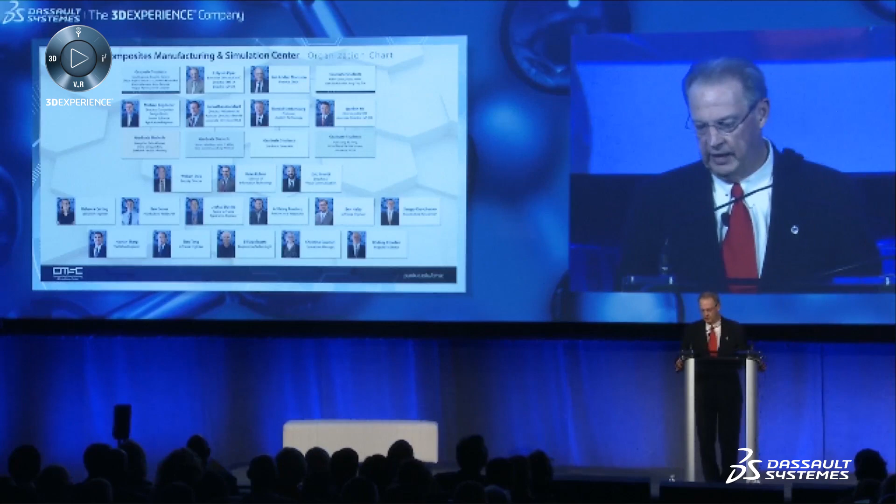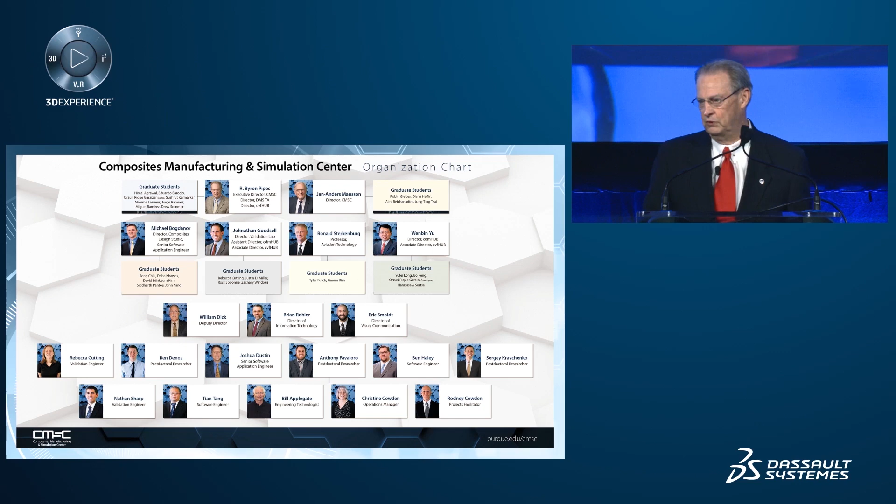Let me just give a few shout outs or thank yous to the team that I represent. Here you see a group of faculty and engineers. What's not seen is the number of wonderful graduate students that are involved in this group. I want to call special attention to Jan-Anders Mansson, who we've recently attracted to Purdue to join us from EPFL in Switzerland. He and I are partners today. We have a partnership, and perhaps we're the two people in the world who've spent most of our time thinking about how these new products will be manufactured from these materials.

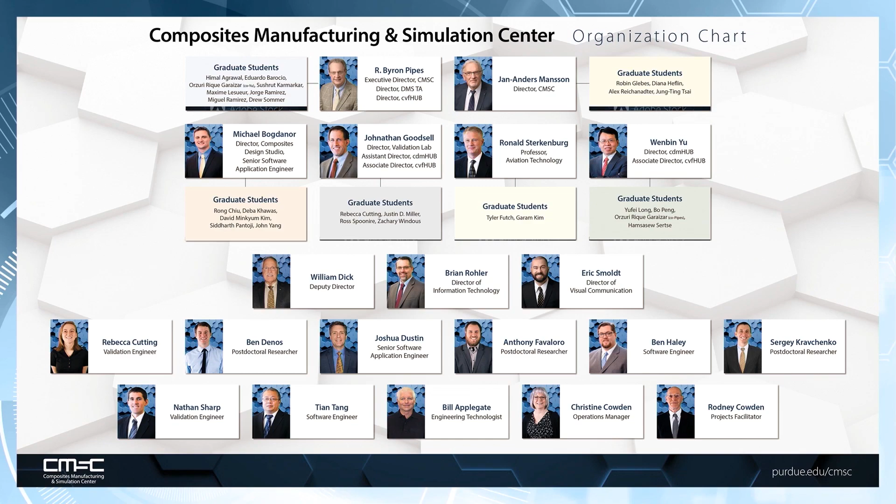We live together in a building called the Indiana Manufacturing Institute. Many people refer to it as IMI, as the acronym would be. This is a building in which the university and industry meet. And it's actually not on the campus. It's in the research park at Purdue, just north of our campus, but within easy bicycling distance.

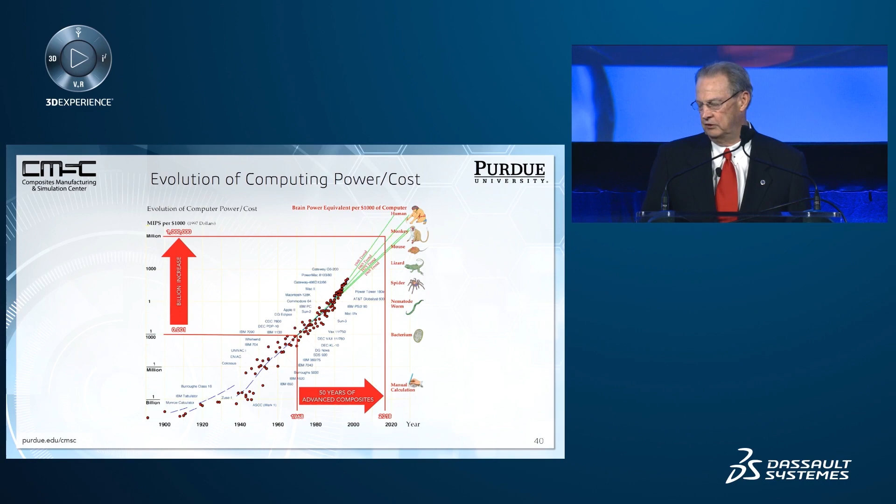I want to take a moment to think a little bit about what has happened just since I entered the field of composite materials in 1968. Look at the increase in power that we have today at our disposal. Now understand, 50 years ago, we were thinking very much about how would we build an aircraft from these materials, and we were thinking about them in all of the processes, procedures, engineering discipline that was required to be developed. So I asked myself at the time, and others did as well, how will we do this? How can we model this problem? How can we engineer it? The answer was not very satisfactorily, I might add.

Computers were relatively small at that time. And look at the increase in power, 1 billion times over this 50 years. So what technology has increased the most during this time? It is simulation power and the tools that drive that innovation.

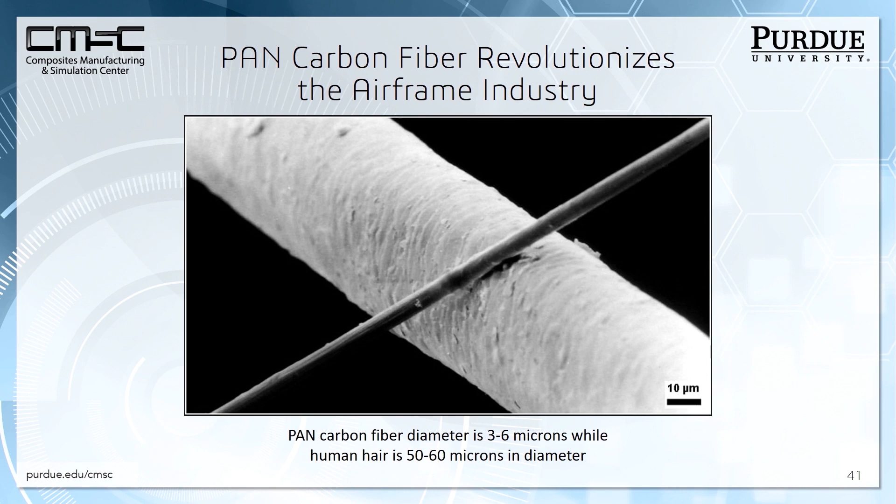Just to put this in perspective, if you've not actually ever seen a carbon fiber, they are so small, they're very difficult to see actually. Smaller than a human hair quite a bit, of the order of 5 microns, and yet these strong and stiff materials provide the foundation for a class of growing materials that one has available to them.

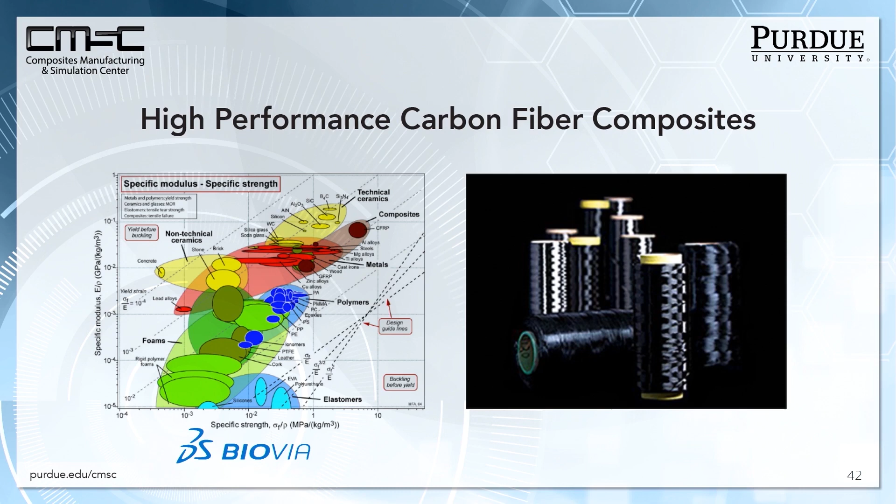By the way, BIOVIA, the tool that here is at the very base, if you will, starting at the nano level and the molecular level, can in fact produce or predict the properties of many of these material systems today, and that capability is growing. While I'll not illustrate that concept here today, it is at the foundation of much of what we have done, both in fiber synthesis and in polymer synthesis and their interactions. So there is science at the base of all of this engineering, as you might expect there must be and will always be.

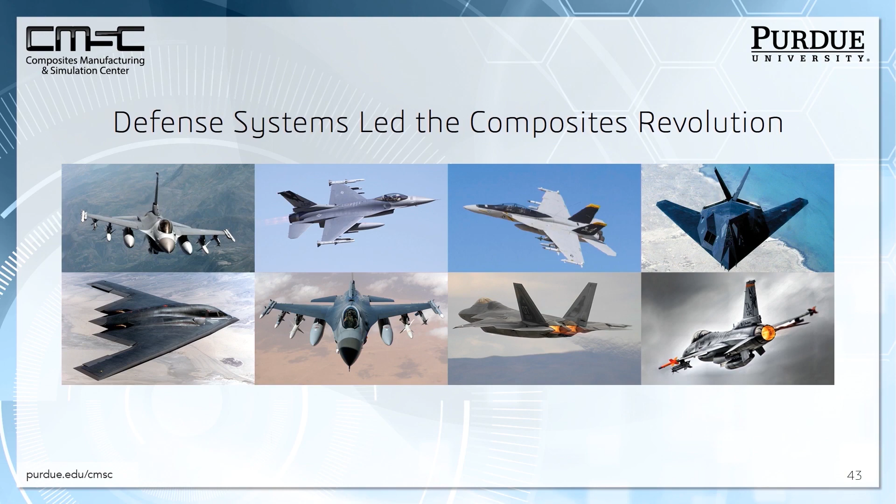What has this technology produced first? Well, in this country, we perhaps spend more money in defense of our nation than we spend in anything else, including health care, although the two are beginning to rival one another as they should, in my opinion. I hope there comes a day when we spend all of it in health care and human prosperity. But the first application of these materials was in defense. And we've gone through a process where we learned how to manufacture them, we learned how to deploy them.

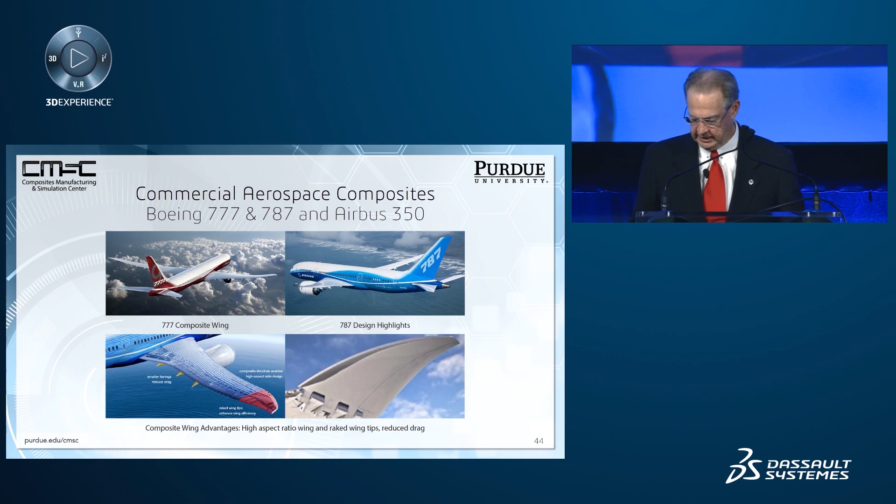That took some years. Following that, many of you may have flown here on the 787 or the Airbus 350, both of which are all composite. And today we're introducing an all-composite wing in the 777X airplane, soon to be released and, if you will, roll off the manufacturing floor. This airplane has a wing that's so large it has to have a hinge at the end so that the plane can roll up to the gate for the passengers to either enter or depart. But it's an enormous accomplishment on the part of the Boeing company, and that is underway. This gives us greater efficiency. Flights now can take place with less fuel and less pollution, as the case may be.

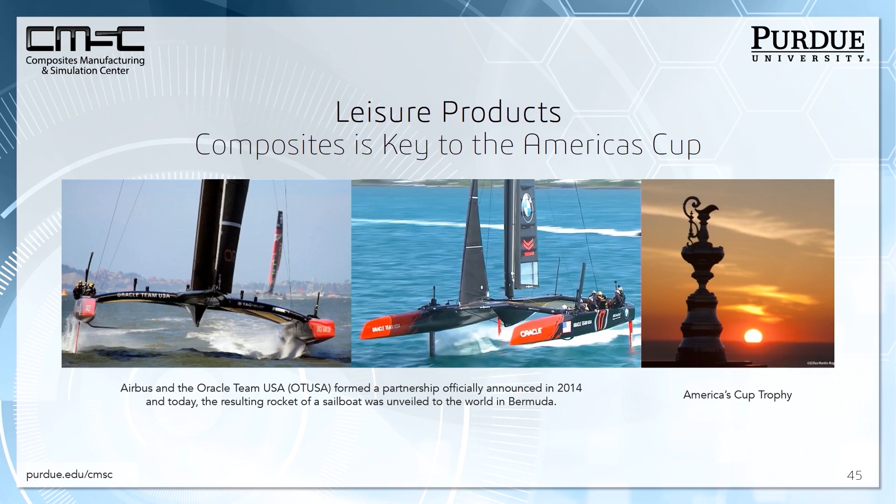From that has come leisure products. Interestingly enough, as we thought about the application of these materials and the future, the leisure product industry immediately stepped into that opportunity. And carbon fiber now provides the primary material form for the America's Cup applications you can see here. Not only the hull of the structure, but all of the mast structure, the wing, if you will, the sail, are all carbon fiber. And this competition has led the way in teaching us how to drive the technology to its limits. I'll speak more about that in a moment.

An extraordinary accomplishment, but notice that this vehicle is also manufactured at the rates at which automobiles must be manufactured in order that hundreds of thousands of units can be produced in the time necessary for the product to be supplied to those who wish to purchase it. Whereas aircraft, as we well know, can produce products that are produced in days or months. Cars have much shorter time frames for production. This is a subject that I'm going to return to in just a moment.

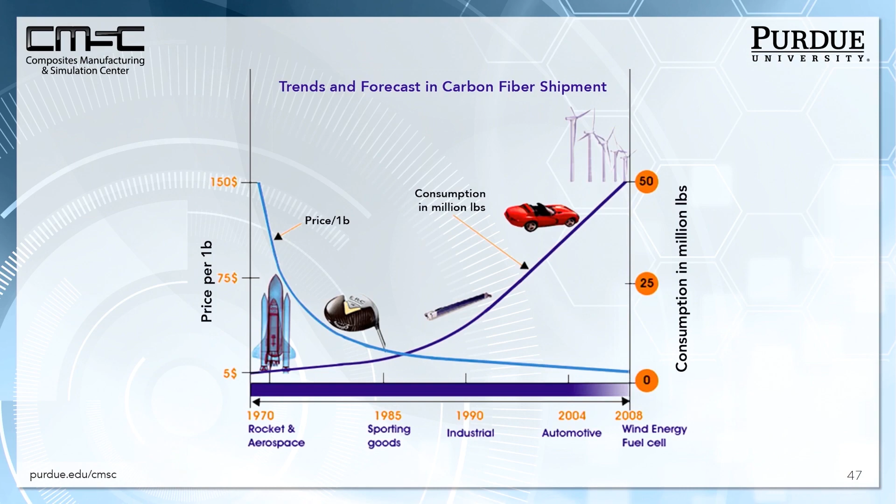As a matter of fact, if you look back over the years of what has happened in this field, and this data is a little bit old, but frankly the curves remain for the next decade, they just continue, such that today we produce over 100 million pounds of carbon fiber in the world, utilized in the products that are being consumed primarily in the automotive and the leisure product industry, all across golf shafts, tennis rackets, and on into wind energy and the like.

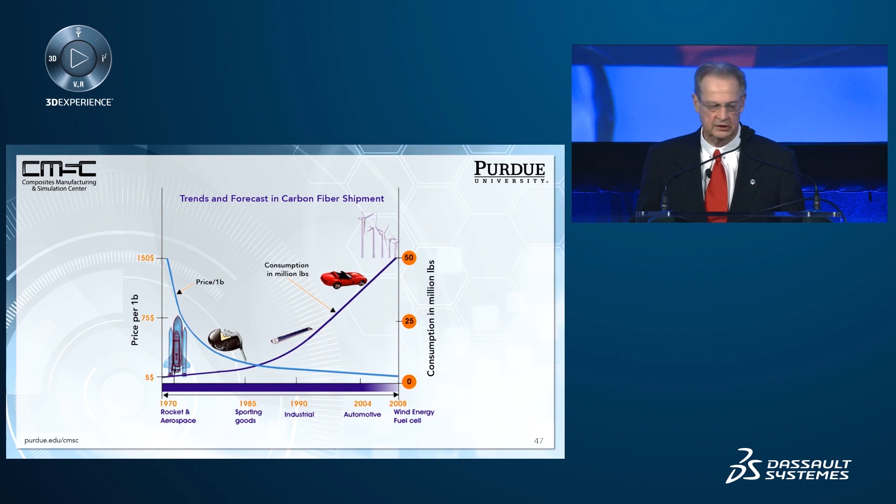One comment is that as we had the major invention of these materials in the space era, their costs were extraordinary. But as leisure products began to enter this market, the cost began to come down as the volume went up. That cost-volume correspondence, if you will, clearly that economic principle continues to hold in this area as well.

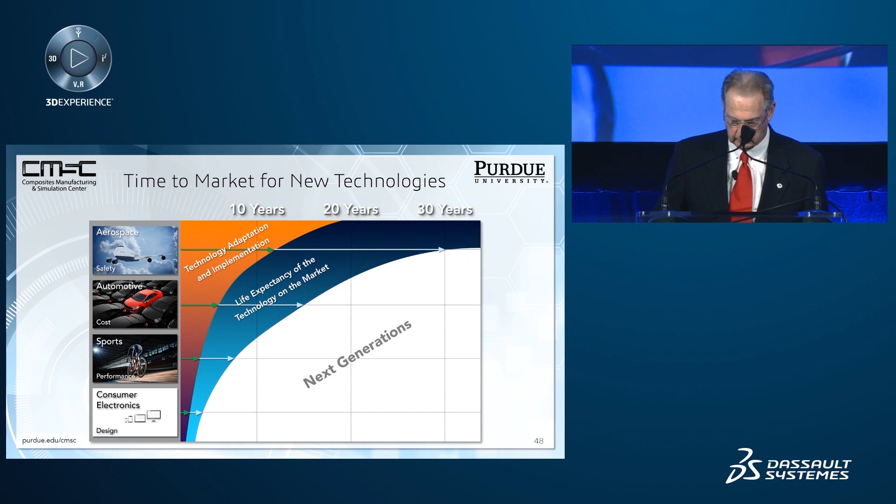Now, as we think about, as you make a business of any of these products, aerospace is a good example where we spend numbers of years of investment in the development of the materials and the design, after which we have a considerable number of years of market in which profit can be extracted to pay back that investment.

If you look at the other end of the extreme, and that is the consumer electronics industry, you see that products turn from the design phase to the market phase in sometimes months. The contrast is interesting, and it suggests to us what is coming in aerospace as well as automobiles. We must turn the technology development time faster in the future if we're going to meet the needs of our population for these products. And now, as you'll see in a moment, some of the industries have discovered this and are understanding what's going to happen and what needs to happen.

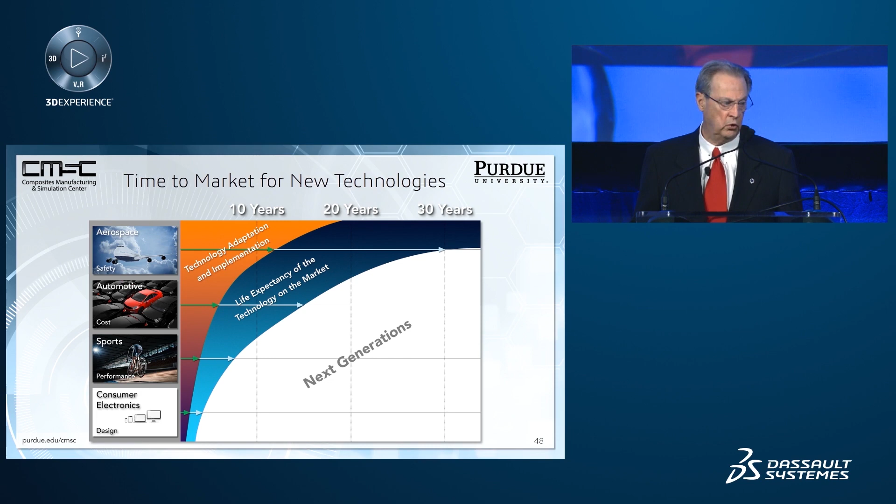Interestingly enough, the composites industry, as we know it, came from aerospace. It went then to leisure products, and now to automotive. It'll be interesting to see, as you'll see in a moment, can it go in the reverse direction? Can we use the rate methods that we're developing on automotive and leisure products in aerospace, and with the same level of confidence we do today? I think the answer is yes, but let me give a couple of examples.

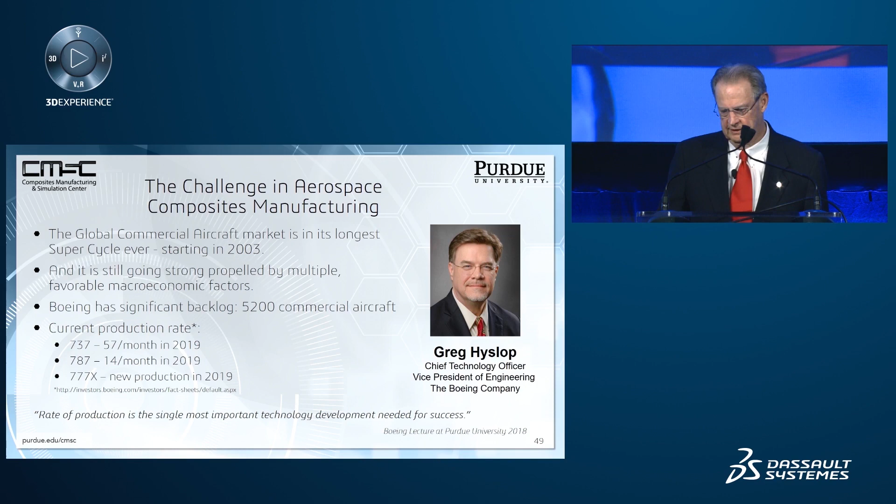Greg Hyslop is the Chief Technology Officer of Boeing, and we recently met with Greg. He came to Purdue to give a talk on what he was doing, and he appealed to us that he has this challenge. Perhaps the whole aerospace industry has this challenge, which is the demand exceeds the ability to produce in the time frame which we have. We must accelerate this manufacturing process.

Just look at those numbers. A backlog of 5,000 orders, the ability to produce much less than that. How do we meet that objective? And he appealed to us. Spend some time thinking about this. Come back to me with some ideas, and we're doing that. By the way, the supply chain that he had for the 787 is a global supply chain.

Now let me return to the word language for a moment. And I don't mean English, I mean simulation. What is it that could possibly tie this complete supply chain together in an efficient way? There's really only one answer, and that's simulation. It has to be the answer. But is it? Well, not yet, it isn't. As a matter of fact, as I'll state in a moment, there's some challenges here. There's some challenges to access. There's some challenges to need. I'll come back to that shortly.

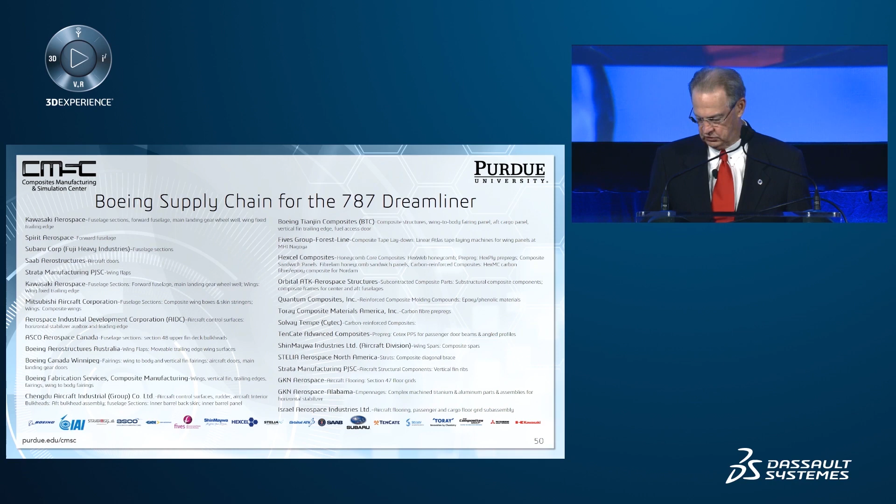So, if simulation is going to be the language of innovation, and if these products are going to be supply chain based, large numbers of suppliers worldwide, lots of different cultures and languages, how do we glue them together? The answer is the supply chain must have access to this language and to this set of simulation tools.

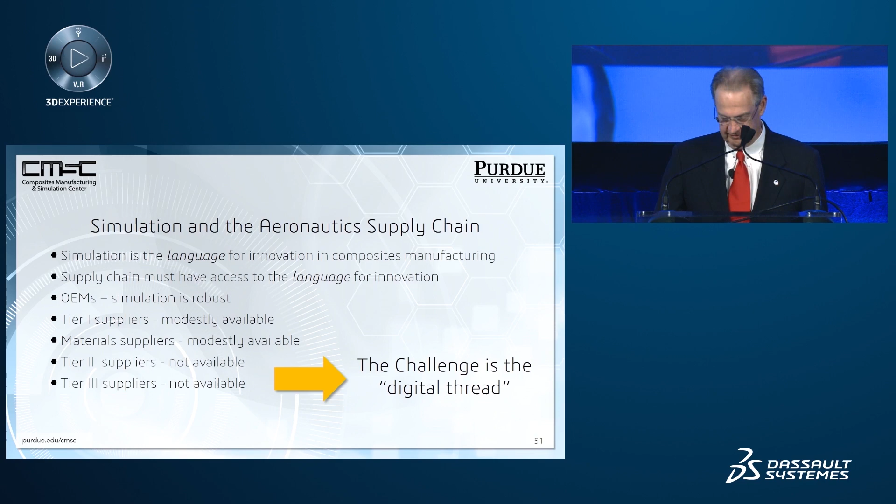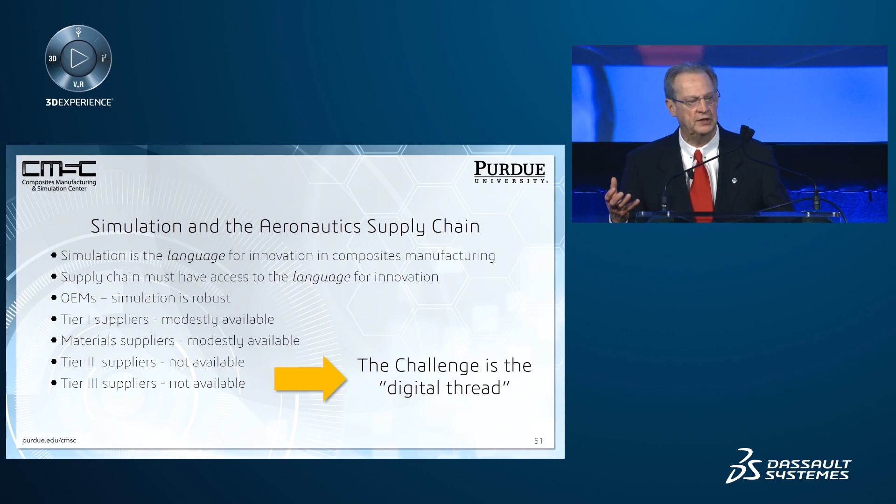Today, OEMs have it. They do. They helped generate it. They drove it. Material suppliers and tier ones modestly have it. Tier 2, tier 3, they don't have it. They need it. They must have it. So how do we preserve a digital thread if people or organizations within that digital thread don't actually have the thread? This is the challenge, I think, that we are faced with today.

So let's look at a vision for how that might be if they had access to it. If they had everything easy and in their hands and had the educated human talent and engineering talent to use it. Well, we could begin to deliver manufacturing informed performance, not the performance of something ideally designed and perfect, but that which was manufactured the way it must be manufactured and the performance that comes from that. We need to do that.

We must have a digital twin in manufacturing, not just a digital twin in geometry. I thought of the example just now about the digital twin of the human skeleton. You must actually model what is there, not what you'd like to be there in the design process. So we need the Composites Virtual Factory. If we have that, well, how do we deliver it? How do we deliver it to the supply chain?

I want to show you an example that we're developing at Purdue that we think is maybe an early example of what you will do as this goes forward in what we're calling workflow apps. Think phone apps, and now you have the analogy that I'm thinking about. A single, if you will, focused solution by the simulation code that you're using. It doesn't solve everything, it solves only what I need.

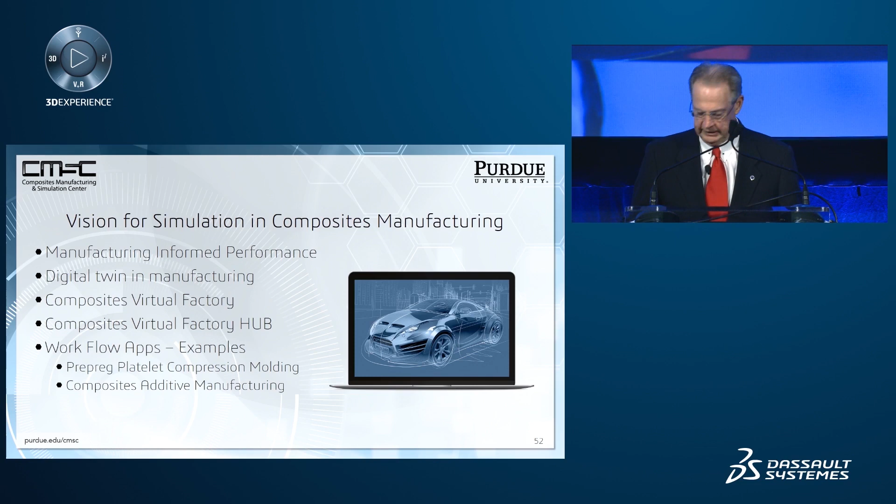There are an infinity to do, but we have identified 12 major ones that we think are the right ones that will capture all possible manufacturing methods. Of course, that's not possible, but at least some have not been invented yet. And I'm going to choose prepreg platelet compression molding today as an example because it illustrates how one must integrate several competencies to produce these apps.

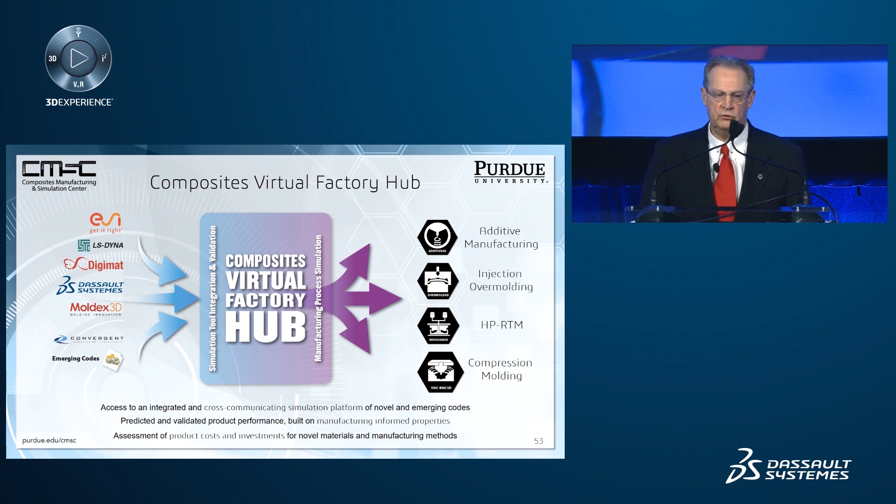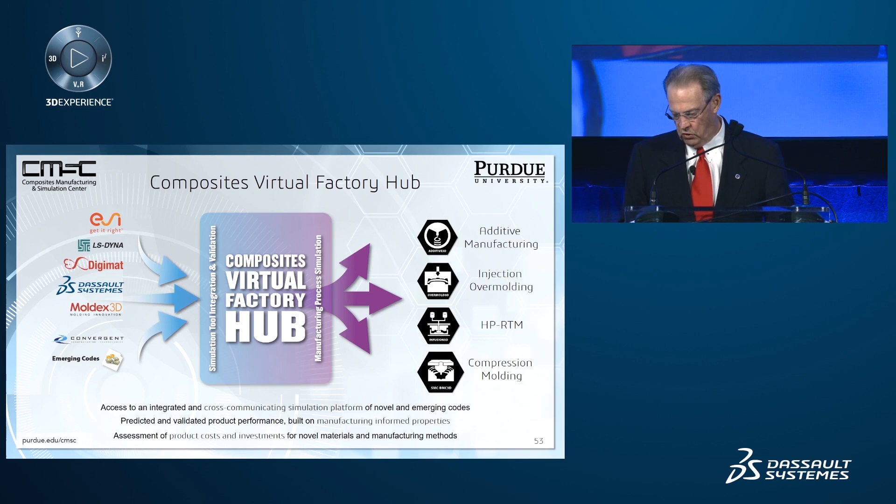On the right, you see the app for additive manufacturing, additive 3D. You see it for injection overmolding, overmolding 3D, high pressure resin transfer molding, and so on. The example we're going to go through today is compression molding.

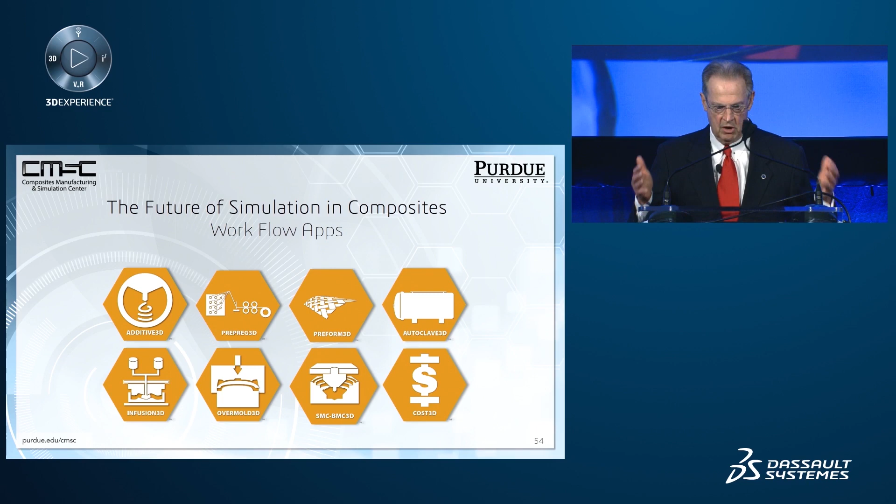Why is this important? Because in manufacturing, I start with a manufacturing process to produce something. I do not start with all possibilities. I must choose among these, and I must model all aspects of that. Here I've identified additive 3D, prepreg 3D, and you can read those. The last of which is cost 3D, meaning cost modeling must be integral into manufacturing, as we know.

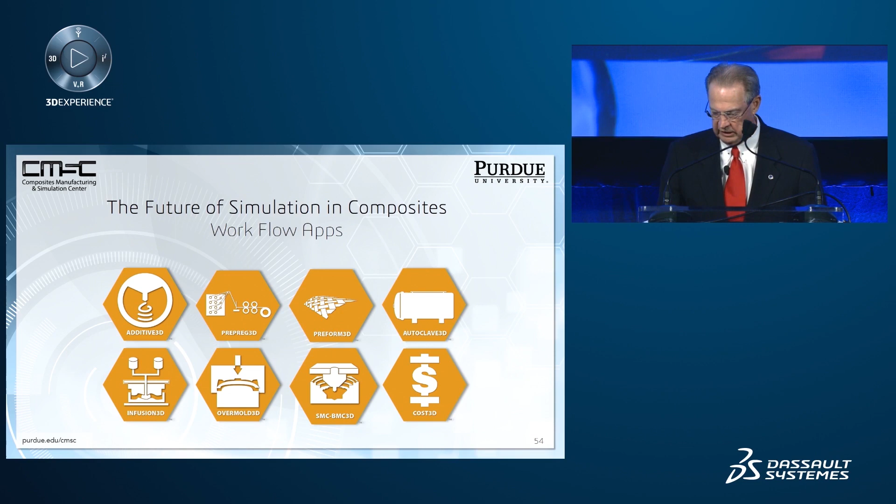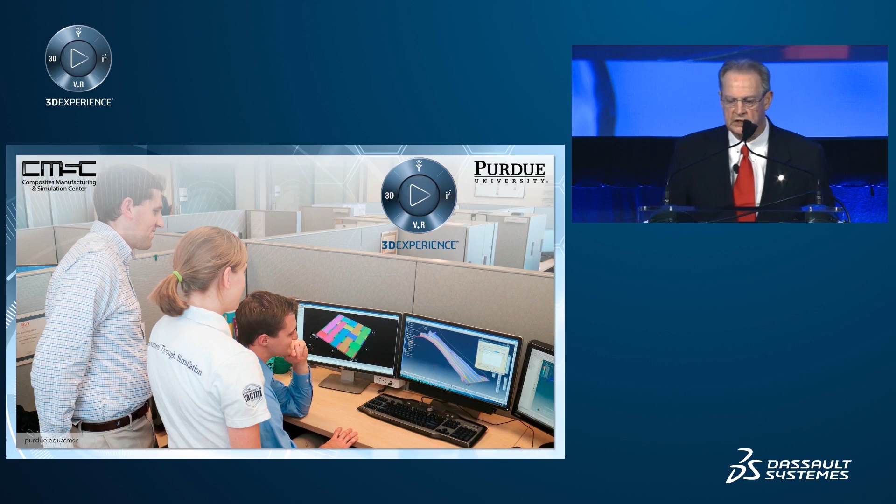I want to say that the 3D experience and the world of the Composites Virtual Factory are in many ways coincident and in many ways require one another in structure. In the first case, the people that are necessary for that are illustrated by 3 of our engineers observing and participating in a project related to a specific manufacturing process here. And then the simulation tools themselves that support those people. That is the Composites Virtual Factory of the future.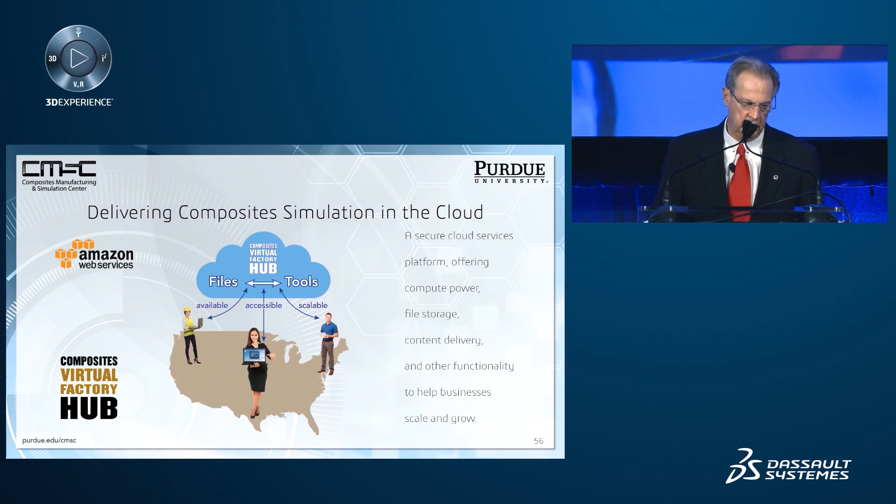It's delivered, and the version that we're working on, the Composites Virtual Factory HUB, it's delivered by the cloud, and it's delivered to a browser-based system so that individuals can, no matter where they are in the food chain, if you will, the supply chain, have access to these capabilities.

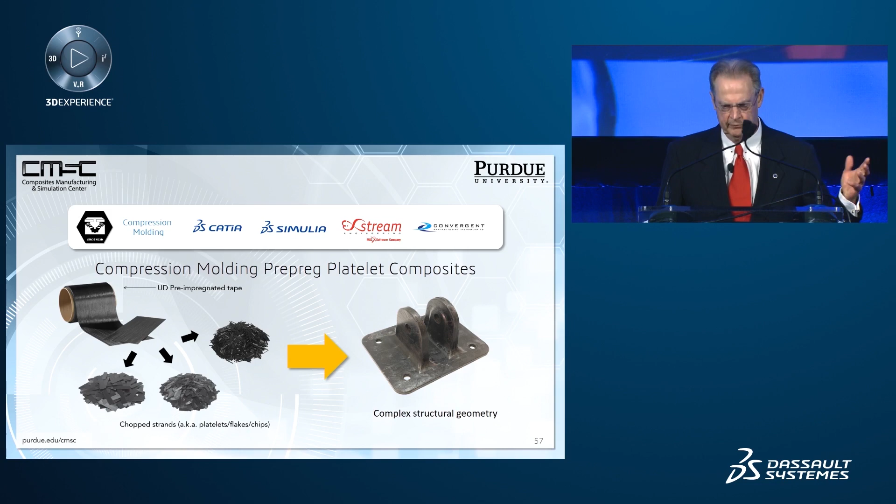Let me take one. And I know that not everyone in the room is a composites expert, but just take a moment and follow with me. Platelet composites, we start with a prepreg tape. We actually have continuous fiber in that tape. It's very much like fiberglass reinforced tape, if you will, that you wrap a present with. But this is carbon fiber. We cut it into small pieces. We then mold it into parts.

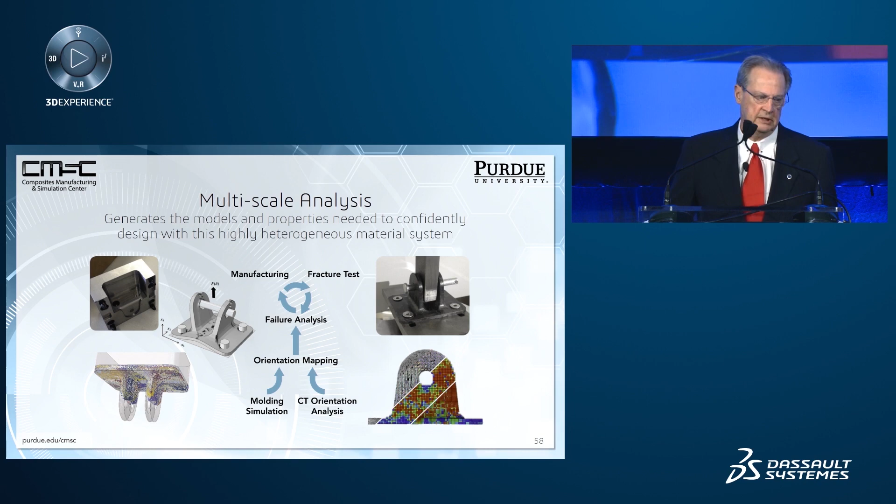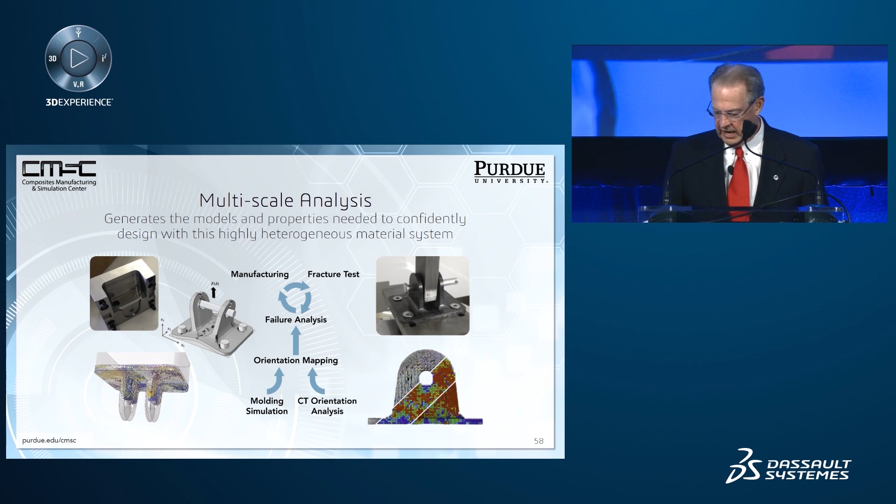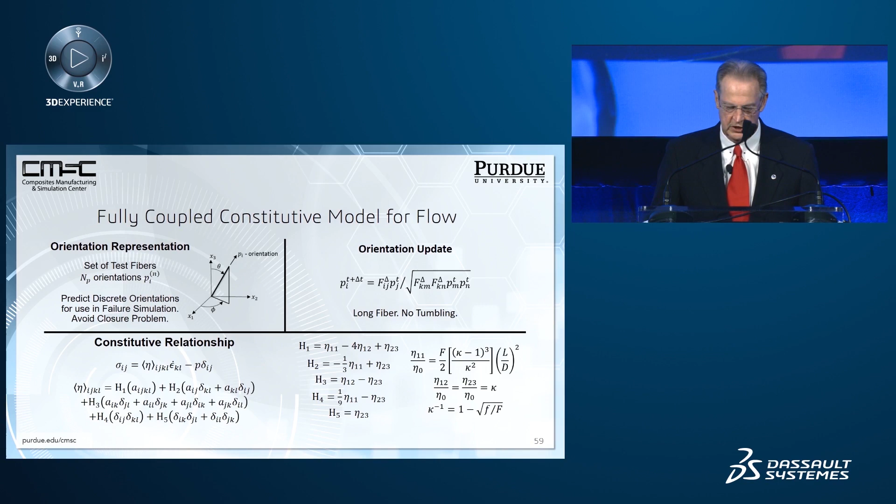The question is, can you follow that molding, develop those internal geometries, very much like the internal geometry of that orthopedic structure? Can you model that process? And the answer is yes, but one must start with some relatively sophisticated mathematics. Here we have the tensor for viscosity of those systems. It's a 4th order tensor, and it's related very much to the orientation of the fibers in the system. So we must follow that orientation.

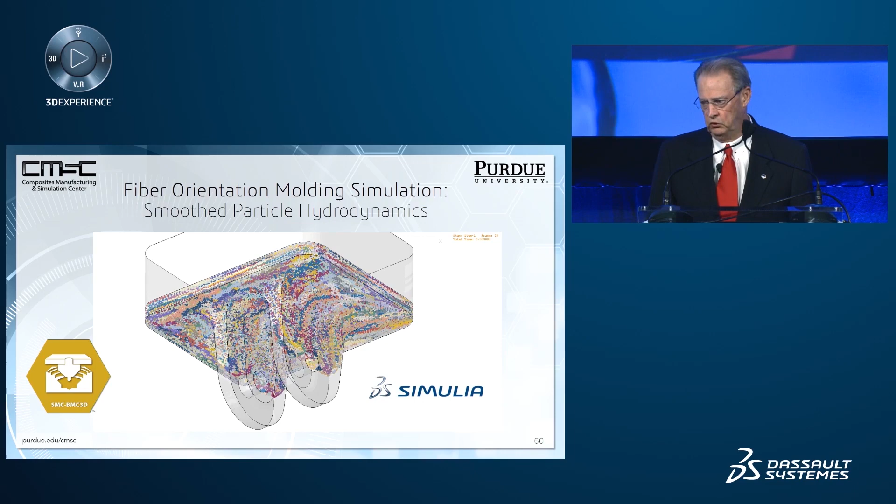And here I show you some smoothed particle hydrodynamic simulations within Abaqus, perhaps never intended for this purpose, but now showing that we can follow the platelets as they are cut in the part. We can follow them. We can follow their orientation state. So now we have more complexity inside the material than the geometric complexity that has been described so far. That geometric complexity internal is mapped into the real part.

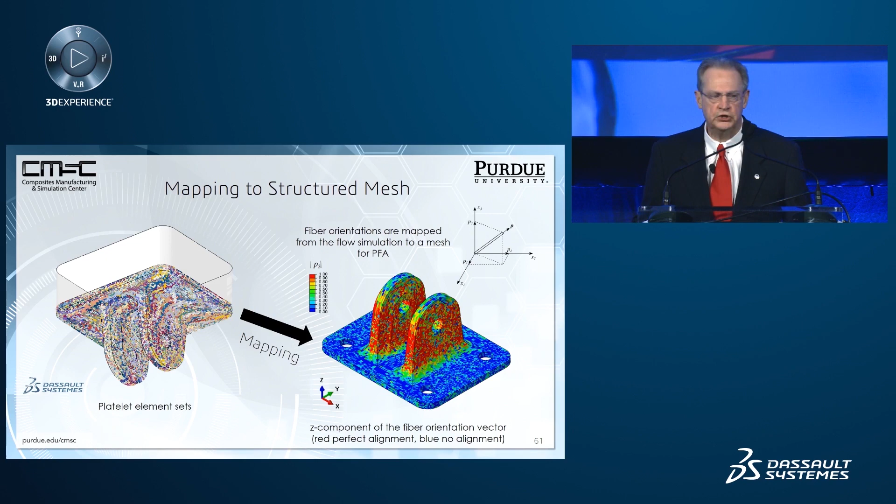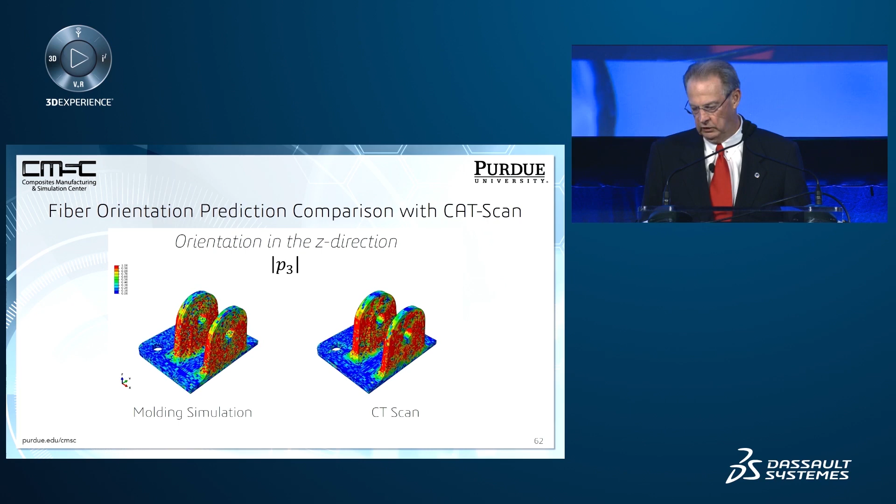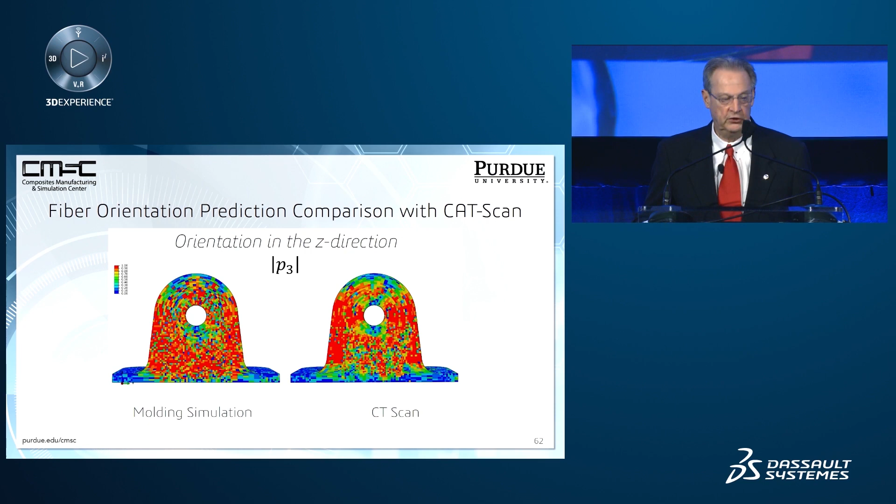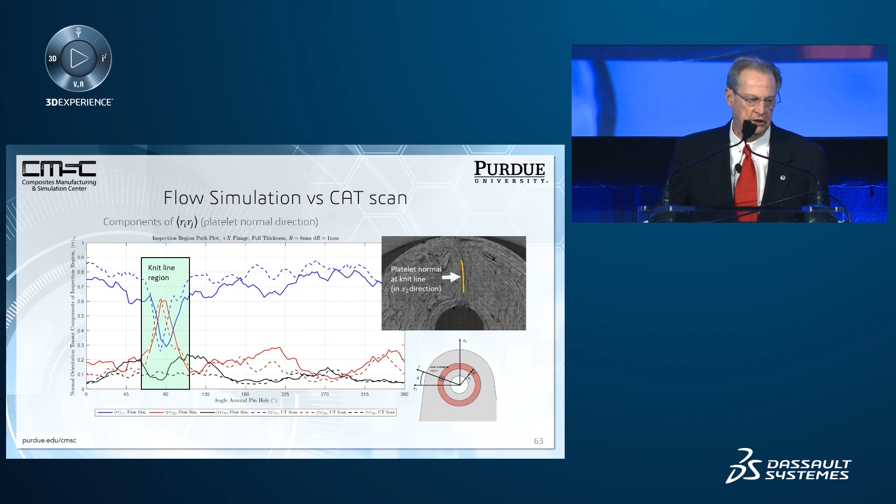And then if you take a look at plotting around the molded-in hole, if you will, you see how good that simulation is, even in very discrete points within the structure. We can simulate very complex problems in these systems.

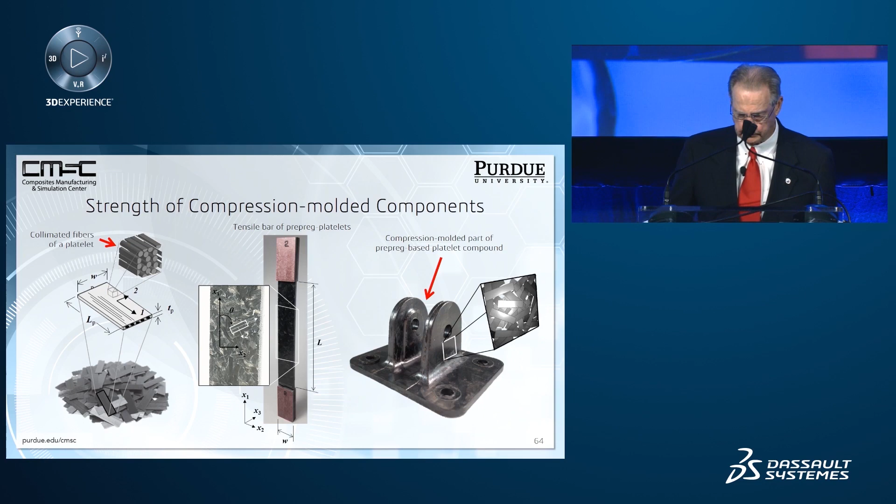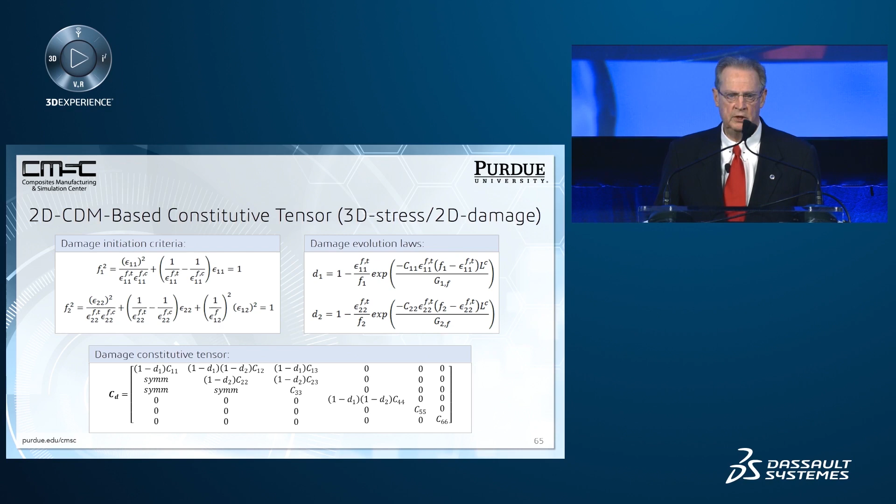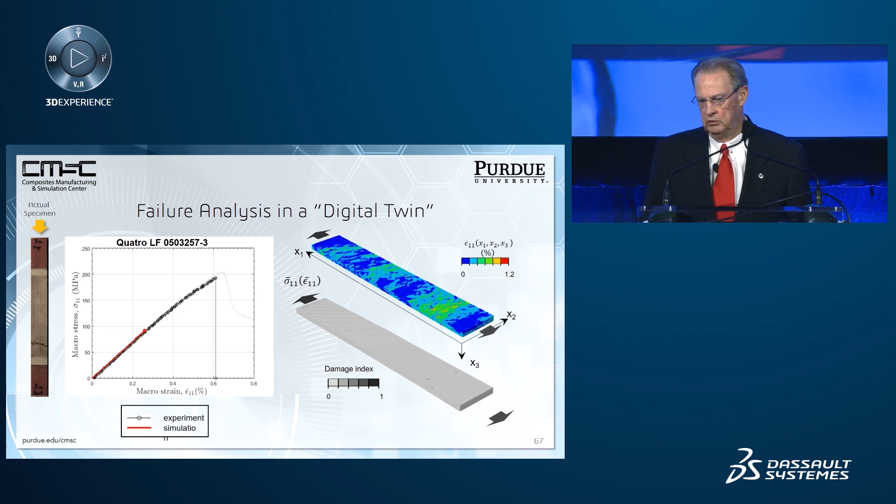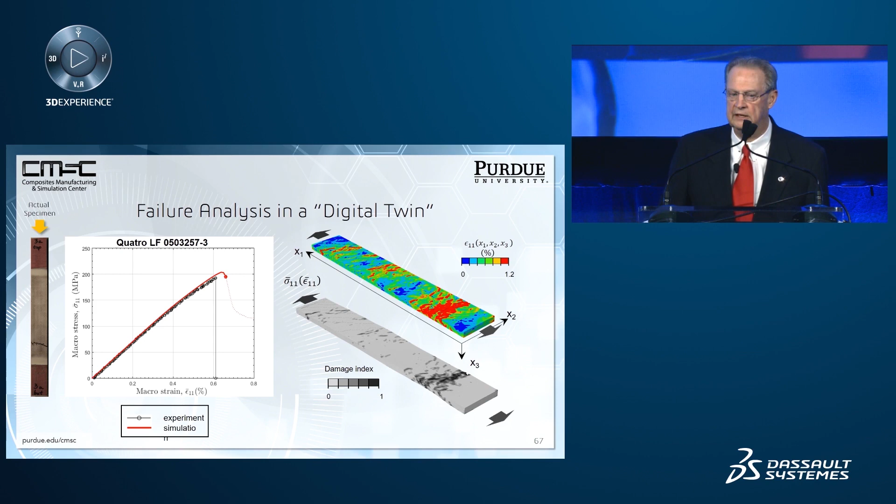Can we do the same thing with the strength characteristics once we know the internal microstructure? Again, we go through some internal capabilities in Abaqus, composite damage modeling, and we construct the virtual image of the real material, and then we can carry out a virtual tensile test of the material. On the right is the virtual part, and on the left, you'll see the red, gold arrow there. That is the real part, and if the question is, did it fail at the right point, and does it have the right morphology? Answer, yes, yes, this works.

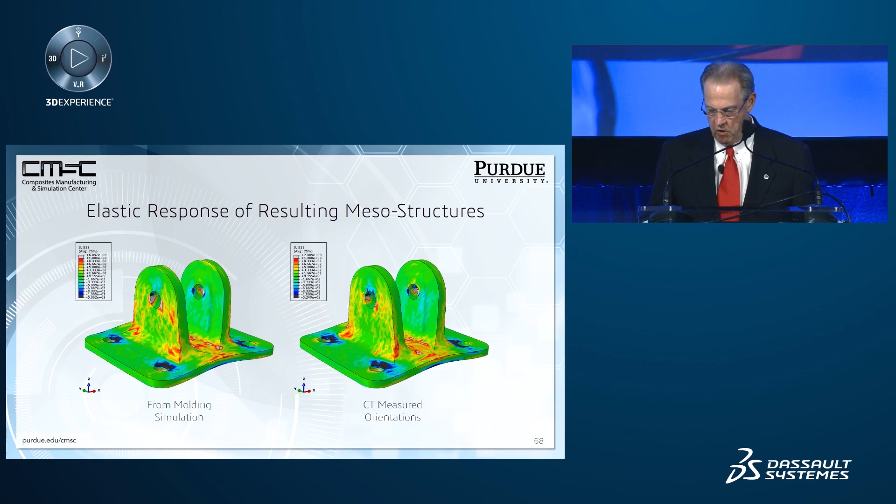So you can apply that then to the complex structure that's shown here. I want to spend a few moments then talking about what's coming, and I want to talk about what NASA has done recently with its multi-scale modeling and simulation vision for 2040. I like this idea very much. In fact, 2020 seems to have been the time I was looking forward to in much of this. Well, that's coming just around the corner, so it's very appropriate that NASA be thinking about what is the simulation of the future? What should it look like?

Interoperable, multi-vendor interaction is essential if you're going to carry out app-like simulation. Traceable, the digital thread, the digital pipeline, the product life management. These are all going to be the essence of that. User-friendly. It means tools focused on specific needs. All of the supply chain needs this. We need pervasive tool learning all across the board. Engineers who are sitting in place today still must learn all of this because it's coming at them at a very rapid rate. And finally, we need to validate these tools. So the virtual laboratory is a thing of the future, or one might even say the virtual laboratory is of the present.

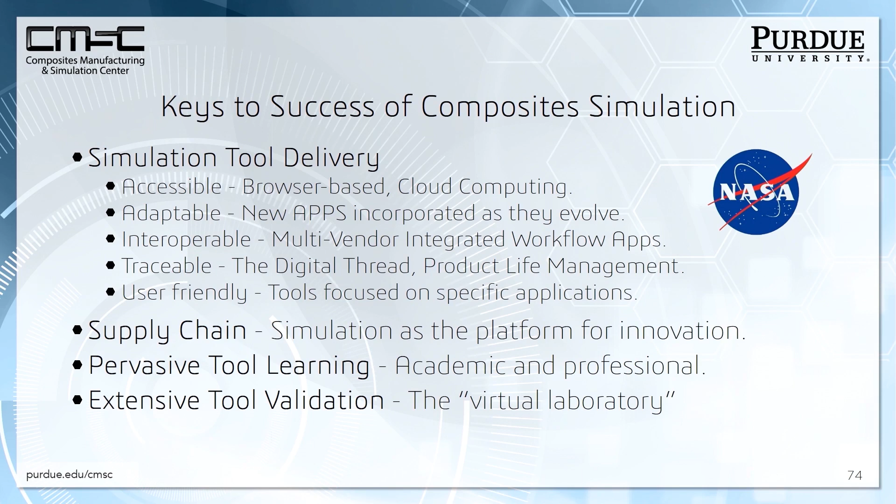So what are the challenges that this calls? What must be done in the next few years? Well, these innovations in the tools themselves, that is to say, the modeling of the physical and chemical phenomena in these manufacturing processes, will continue to develop. We must adapt them and adopt them. These innovations will largely come from small businesses. They won't necessarily come from our large corporations or from us, or even universities. We're going to see more, and still do see routinely, more coming from small groups of people. The systems that we're developing have to have the agility to absorb those, take them, and mature them rapidly.

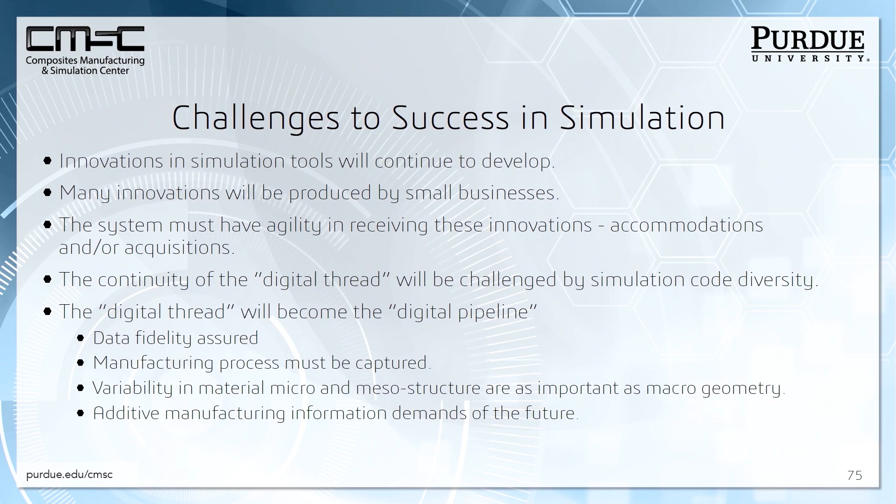The continuity of this digital thread, how do we make sure from one code to the other, that thread is preserved even within the centralized program? So we need to have data fidelity assured. If we're going to use this data, this simulation, to certify flight, human flight, we need to understand that and hold it in the same way that human health needs health records. We must have that in our vehicles of the future. All the manufacturing processes must be captured. We must capture the variability of the material. And of course, we're seeing that additive manufacturing is demanding an entirely new level of detailed information and process simulation.

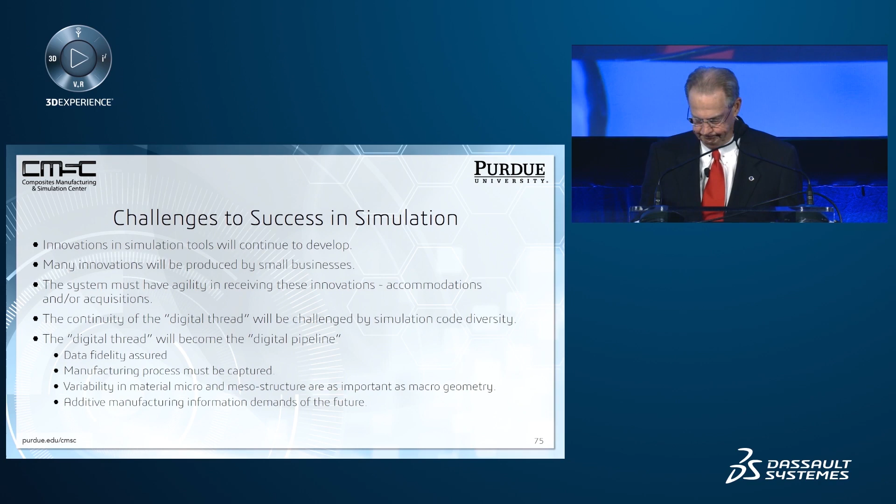So in summary, I would say to you that I believe I've proven, to myself at least, that simulation is the language and will be the language of manufacturing innovation, that this end-to-end simulation focused in applications, I call them apps, is a coming trend, that our ecosystem of 2040 will not only include accessibility, adaptability, interoperability, traceability, user-friendliness, but pervasiveness. It is going to be throughout everything.